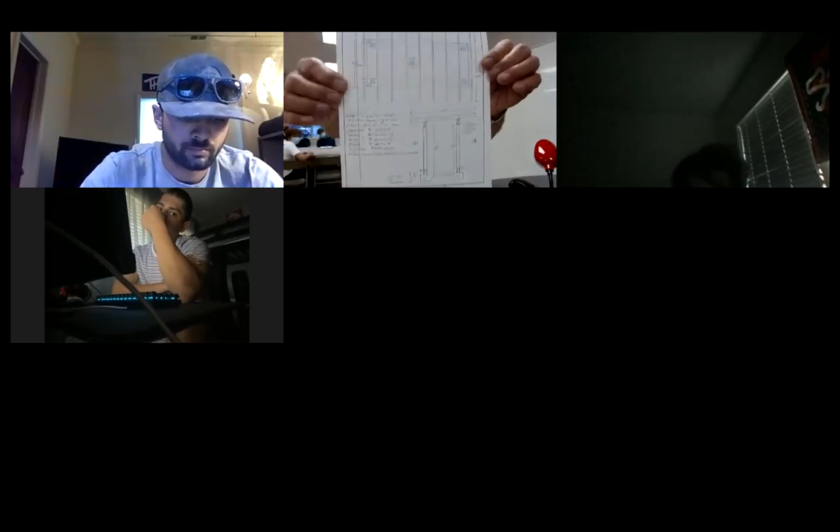When we get to it, I'll show you. I have this stuff I can put on the board, but I have a quote which I'm going to flesh out, and then we can project the plan that I did. You'll see it in more detail, see how I can take off. I actually did a checklist on the plan, which needs a few more things. So let's get down to the test.

But before we do, as is my nature, I got to tell you something about me.

You're not going to find this game. It's produced in '56, I think they probably made it through '60. In 1958, I was traveling with my parents from Missouri to California, I was 10 years old. We stopped, I think, in Phoenix - I don't really know - and I think my dad bought this game. Not this actual game - I bought this one on eBay and got it about a week ago. My dad bought this game, I think, at a drugstore somewhere, and he came back to the motel room and started playing. I remember going to sleep while my dad was playing this game, and in the morning when I got up, my dad sat me down and showed me that he'd worked out how to do this game. Now this game - the whole thing, the second board - this is the deluxe double master set, so when you jump, you just put it over here, so you don't have a pile of pegs to reset your board. You can just put them in this next board, so you're ready for the next game. So the object of this game is to jump a peg.

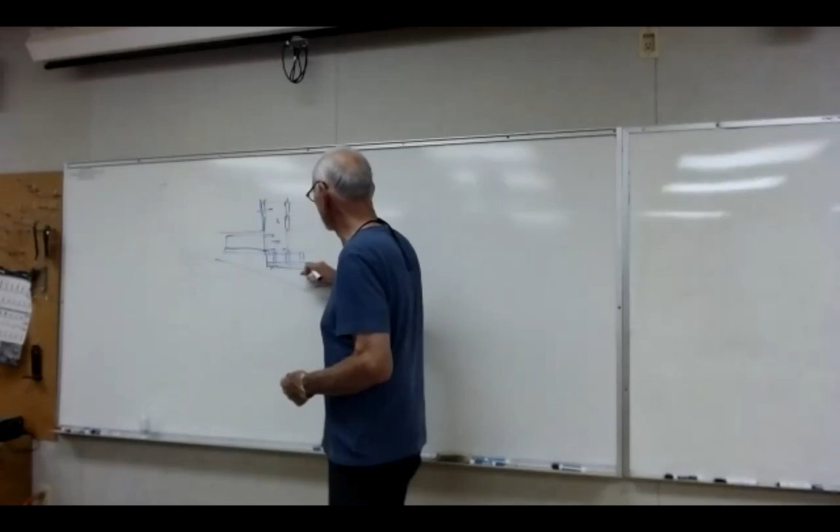Say this is where your floor is, right? You have a sill plate, and there's your rim joist. And now your rim joist keeps going, and you just cripple up. So this becomes a cripple wall. Another plate, cripple wall, a little taller cripple wall, and you just cripple up. We'll get to that more on framing, but that's the idea of a stepped foundation.

Stepped foundation. Okay, Rodney, in the case of that, do you have to drive the rebar down way further? No, the rebar is never driven into the ground. The rebar is suspended inside your forms, always. You don't want the rebar touching the ground at any time. You don't drive it, you can hang your rebar from forms.

So in a case like that, what's keeping it from sliding down the hill? It's all tied together, staked and nailed. Each one of these form boards above the trench has got a stake driven in the ground, and a duplex headed nail. It's got a head that you can pull out, and that's what keeps the forms rigid. When your forms are done right, you can walk on your forms. And then you hang your rebar from the bottom and step up, and it's all tied together.

So there's nothing on a step foundation holding the concrete into the ground, other than the trench. It's just sitting on top. It's down in a trench, and it's filled up the trench.

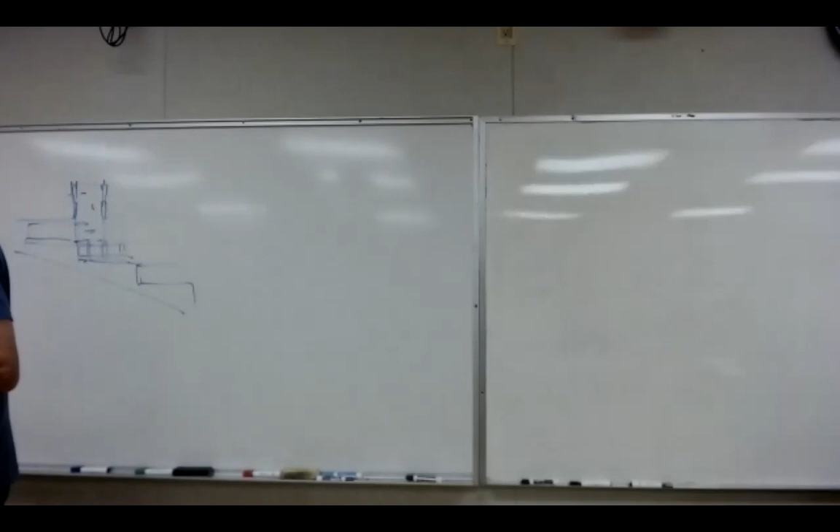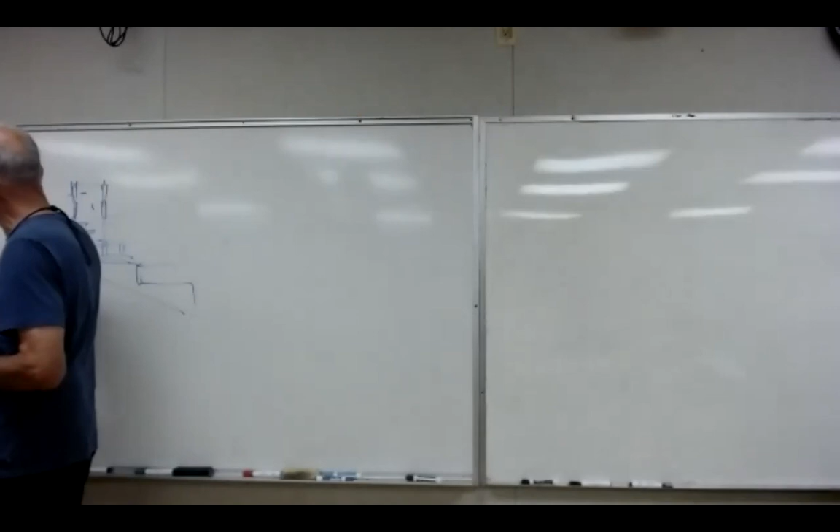Depends on what the engineer says. The engineer will tell you exactly what that foundation needs to be, how deep the foundation needs to be, because he'll do his calculations based on a soils report, which will tell him where undisturbed soil is. That's what he's looking for. He doesn't want to go down and fill. He wants the bottom of that footing trench, undisturbed soil. That's where your concrete goes, in full rebar, and then you build on top of that.

And if it's a slab on grade, you just come up above 6 inches, and then there's your slab, and it's all filled with concrete. On a raised foundation, you do a footing stem wall all the way around, and then you hang joists, so you have a minimum of 18 inches of clearance. So if you're doing a raised foundation, we've been talking about slabs on grade, and that shade structure will be slab on grade.

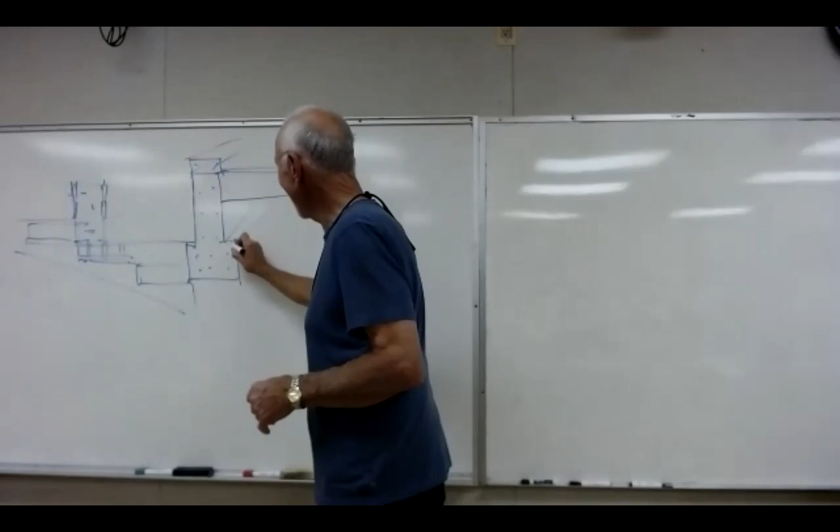But if you're doing a foundation wall, here's grade, right? And you're doing a foundation wall, it's really down into it, kind of a big footer like that, bars running through it, and bars running through this, going like that, and like that. That's all under grade, and this is grade, right? This baby gets stuck over, and then you can do this a variety of ways. You can put a sill plate on here and then build your walls up from there, hang your joist off that sill plate. You can hang them down like that. There are a variety of ways to frame, but this joist has to have 18 inches minimum clear to the ground.

That's code. That's UBC, that's IBC. You have to have 18 inches. So you usually have to over-excavate to get that 18 inches.

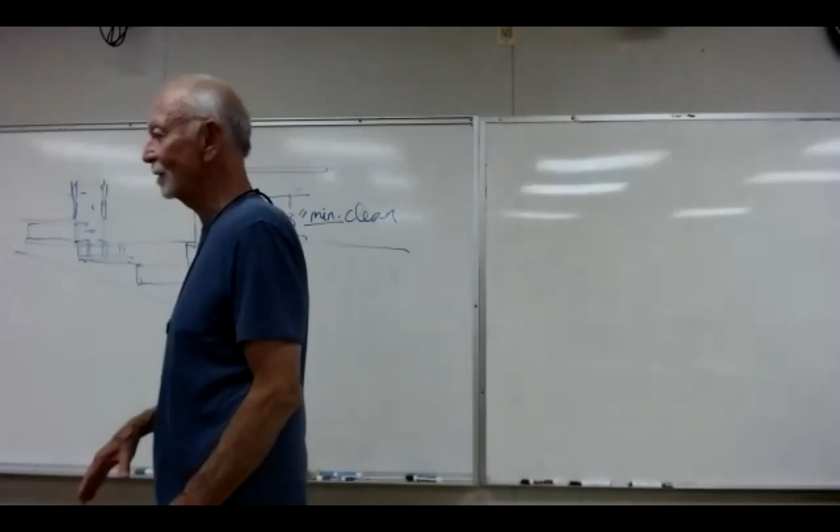And I prefer a raised foundation any day over a slab on grade, personally. Why? It costs a little bit more. Slab on grade is easier to do, takes more concrete, less wood. It's lower, it's faster. But a raised foundation has its limitations. With slab on grade, you're down low. Where a raised foundation, you're up above grade. You're where the critters can't get you as easy and the water can't get you as easy. You have give on your floor. You have a wooden floor. You have some forgiveness on your floor. It's not this concrete floor. I hate concrete floor if I'm spending a lot of time on it.

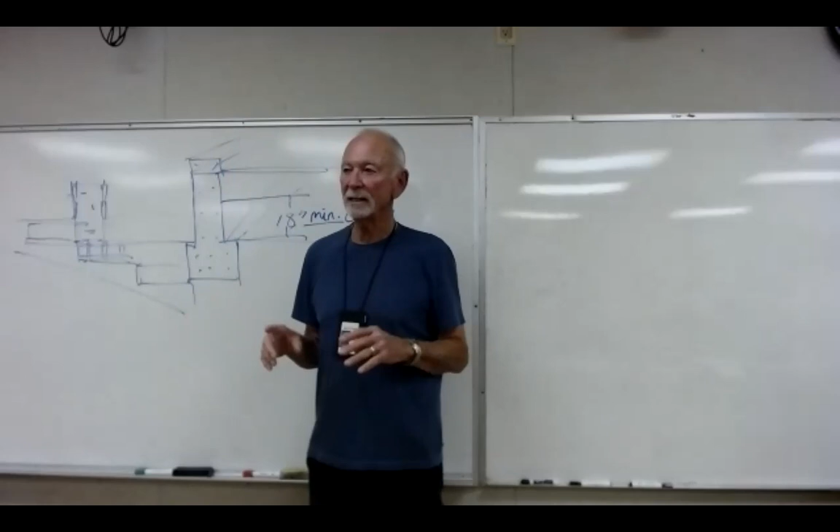And you have a place to run water, you can put a forced air unit down there and run your floor ducts, because here's how forced air works. Right now, FAU, a forced air unit, is the most efficient way to heat your house because it's a closed system. Now, there are people that will argue parts of this, but they can't argue the fact that a closed system is the most efficient way to heat your house at this point. And the best way to do it is to have your forced air unit low, so you don't have to chase and bring air down.

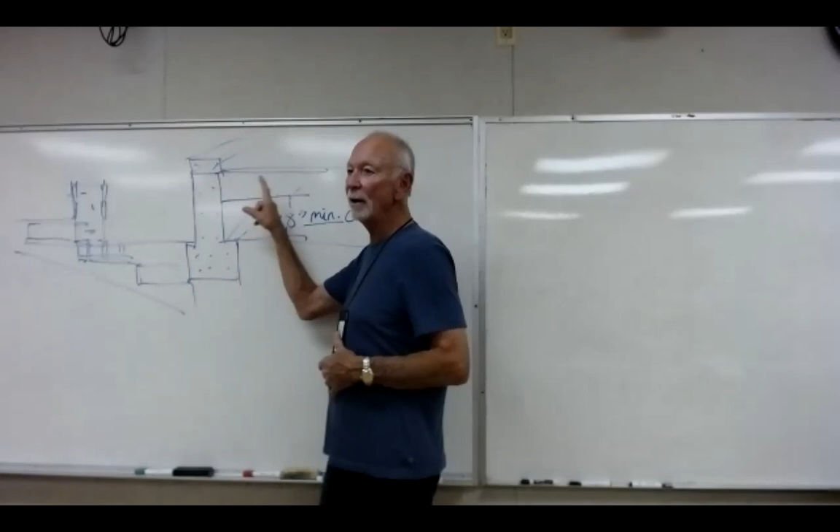So it has a return air grill somewhere in the middle of the house, and then every supply air register, the ducts are run under the house, and they come up and pop up to the floor underneath a window or an inactive French door, the one that stays closed, the door closes against. Inactive French door. Come to my house and look where my registers are, inactive French door, under windows.

And so what happens is that forced air unit, when you turn it on, it's gas fired, makes hot air, right, and a fan. That fan blows through the ducts and it feeds these floor registers. And heat rises naturally, so it comes up hot, and then your return air in the middle of the house is a big grill, and it's drawing, it has a fan that draws air. So it's drawing from all the exterior of the house, all the way across the house, into the return air to be recycled, to have that air reburn, come back as supply air. So it's a closed system that brings hot air all over your house fast.

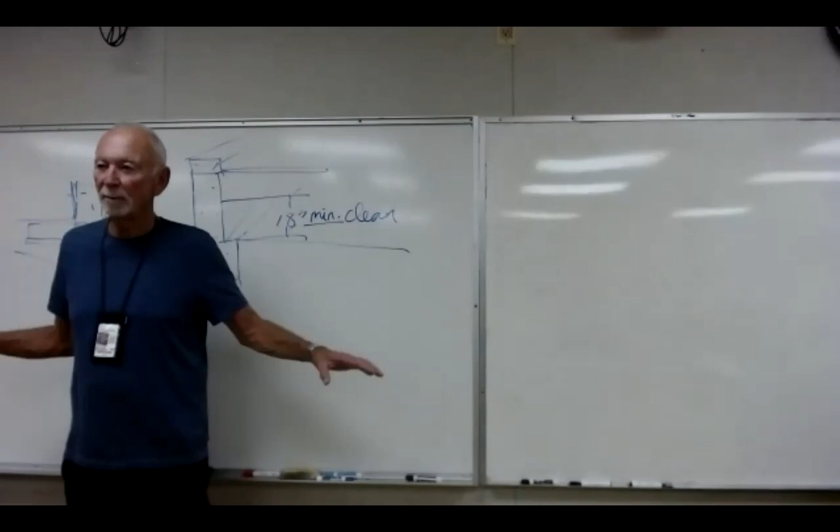My house heats up in 3 minutes. If it's cold, if it's 61 degrees, 59 degrees in my house, I turn that thing on and in 3 minutes it's warm. A forced air unit is pretty much what our heaters are in everybody's house, unless you've got a gas-fired wall heater or a direct vent heater, something like that.

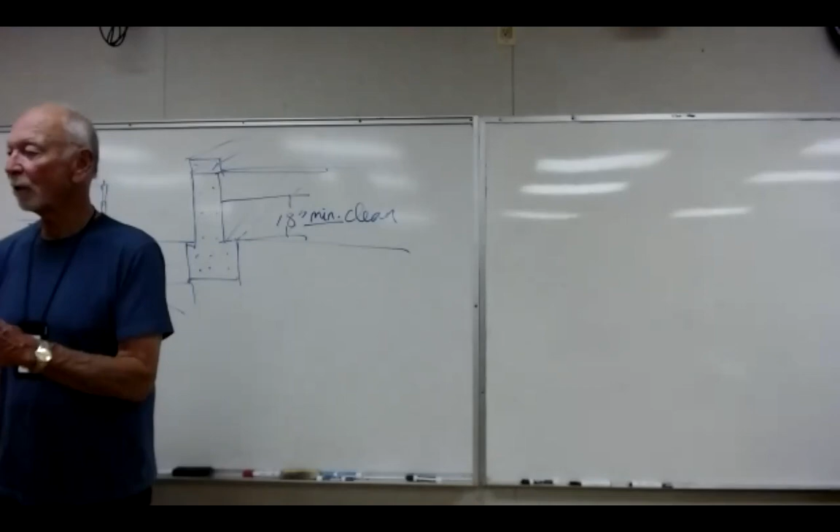If you've got a gas-fired heater, you've got a forced air unit, unless it's an old house. In an old house, you might have a gravity-fed furnace, which are pretty great and based on somewhat the same principle. They have return air that draws, and they have floor registers or low wall registers, usually a register in a wall that comes up low, with a register on both sides of the wall. But the problem with gravity heaters is they have a heat exchanger, and their heat exchangers are prone to eventually cracking. What happens is carbon monoxide, produced in the combustion part, gets into the ducts and into the supply air, and you never wake up.

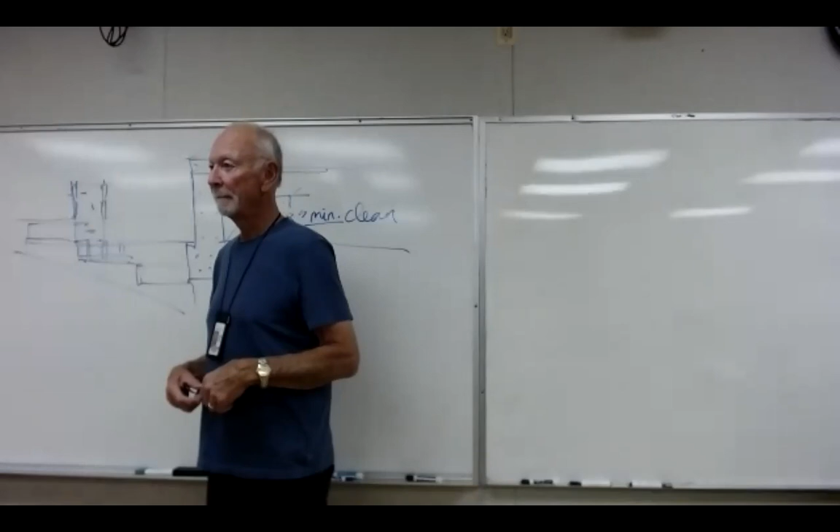You go to sleep at night with your heater on and you never wake up because you die in the middle of the night from carbon monoxide. That's the reason we're required to have carbon monoxide sensors in the hallways and stuff like that, because of gravity heaters. And that's the only reason. There's nothing else that produces carbon monoxide. I mean, I take it back.

We produce carbon monoxide when we're in our bedrooms sleeping. Right now, I'm producing carbon monoxide. We all are producing carbon monoxide. We have fairly good ventilation here, we've got a HEPA filter, we've got some air moving, so we're not feeling the effects of it. But in your bedroom, with the windows closed and the doors closed, they test the carbon monoxide levels and they go sky high. So it's always better to sleep with your door open and your window open, getting air, unless you have an HRV or ERV, which is heat recovery ventilation or energy recovery ventilation, where you're bringing fresh air all the time. You're doing air changes, which is a really good thing.

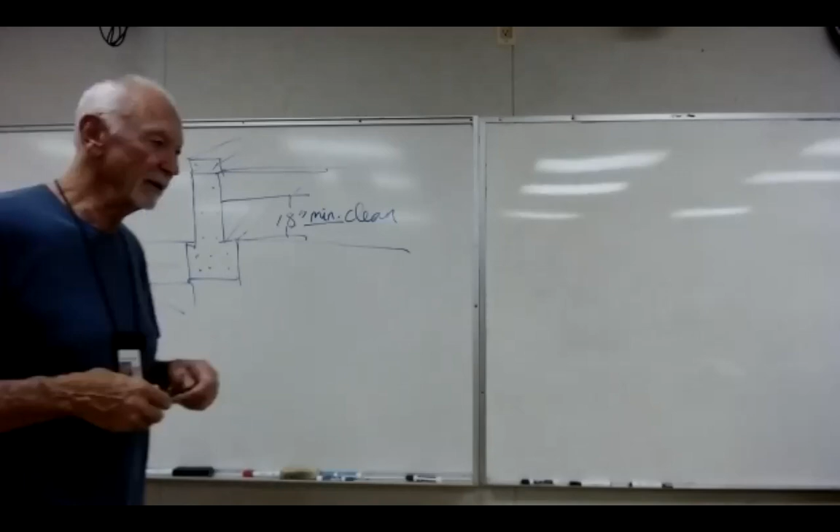We're not there yet, so I know I just deviated like crazy. I'm going to do board feet and then we're going to take a break.

Somebody, Jesus, did you show up? No? Did you show up here, Jesus? Jesus had 756. I think Claire, I think you got it right.

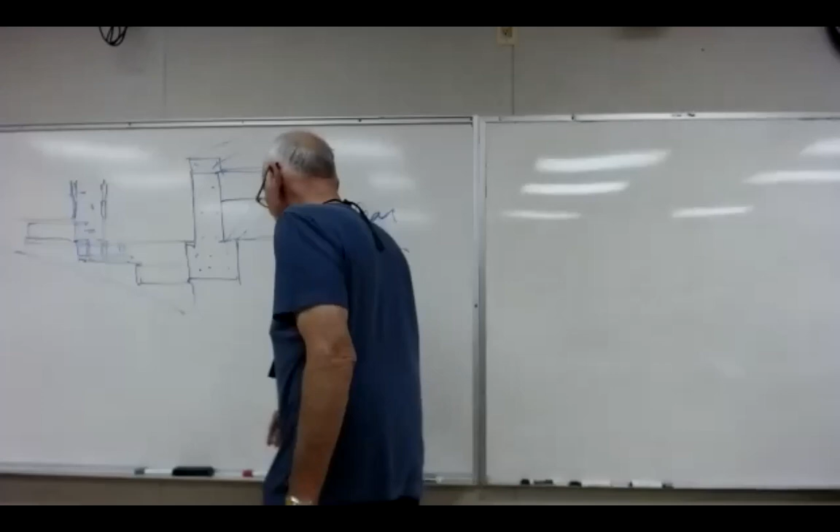Okay, so let's do that board foot problem, because it's kind of, it wasn't the easiest board foot problem. But board feet is pretty important really, because once you understand it, it's how lumber is sold. It's sold by the mill board foot, 1,000 board foot, but forget the mill board feet, just call it board feet. So let's find out how many board feet are in this piece.

This piece of mahogany, it's just a single piece of mahogany, and it's 8 inches thick, 9'6" long, and 16 inches wide. That's a hefty board right there. So you want to know what that board is going to cost, right?

Because this will be on the midterm, I bet you. Let's say you know that genuine mahogany in that size is costing you probably $9,500 per MBF. What does that mean? It means mill board foot, which is 1,000 board foot. So $9,500 per 1,000 board feet. Now, a mill, right, is 1,000.

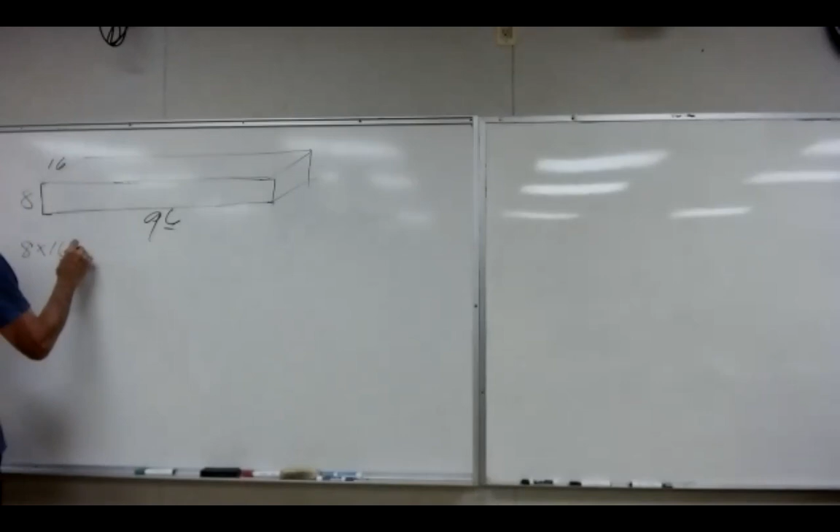So the simple formula, we won't do it the way I do it, we'll do the simple formula: thickness in inches, 8, times width in inches, 16, times length in feet, which is 9.5. Now, 9'6" is best represented in a decimal as 9.5, because 6 inches is half a foot, right? 6/12, we want to reduce that fraction. 6 goes into 6 one time, so it's a half, and a half as a decimal, 2 divided into 1 equals 0.5. So it's times 9.5. So 8 times 16 is 128, times 9.5.

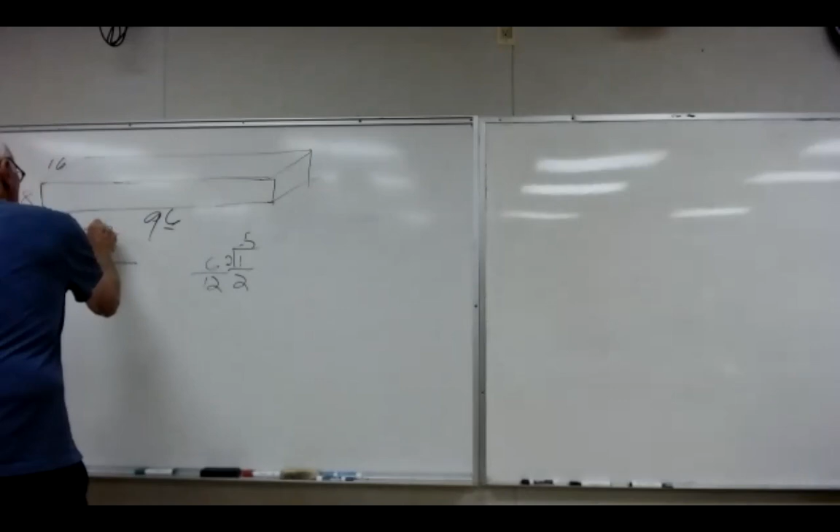All right, 128 times 9.5. So the answer to this quotient is 1,216. Of course, everything's over 12, right? So divided by 12 equals 101.3.

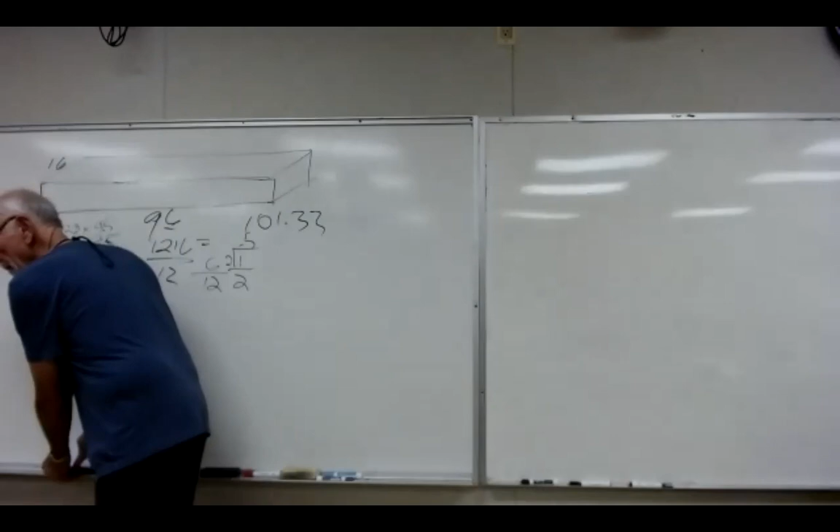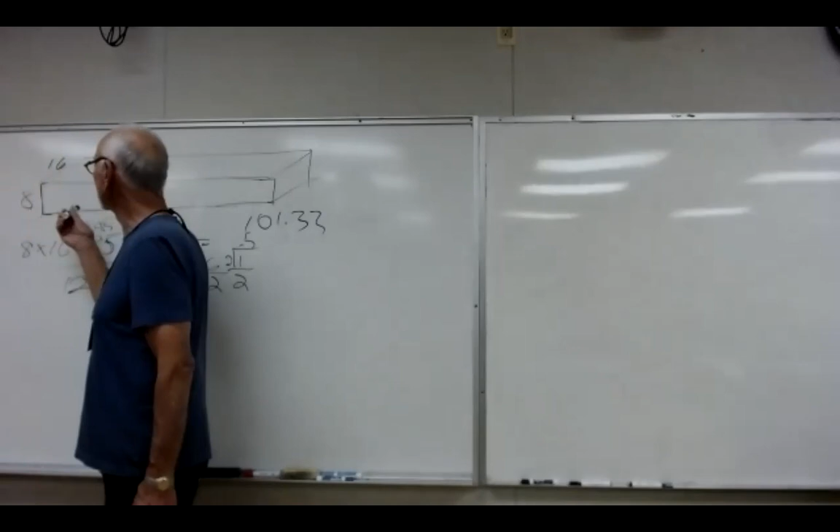101 board feet, okay, see how it worked? Now here's how I do that in my head. I'd go 8 times 16 is 128, because 8 times 10 is 80, 8 times 6 is 48, 80 and 48 is 128. I can keep those numbers in my head. At 128 over 12, well, 12 times 10 is 120. So I know that's 10 with a leftover of 8. 8 over 12 is 2/3. So it's 10 and 2/3.

Or 10 and 2/3, as a decimal that's 10.666 per running foot. So then I'm just going to do that 10 and 2/3 times 9.5. It's pretty easy math, right? And you get the same number regardless of how you get there. The number you want is 101.33.

And what he didn't ask you to do is tell us how much it's going to cost, if it's 9,500 for 1,000 board feet. So at 101.33, we're going to do it times 9.50. Let's see how much that board costs, and that's a real number. So that's 9,500 per 1,000. So we got 101.33 times 9.50 equals, times 8.75 equals, plus...

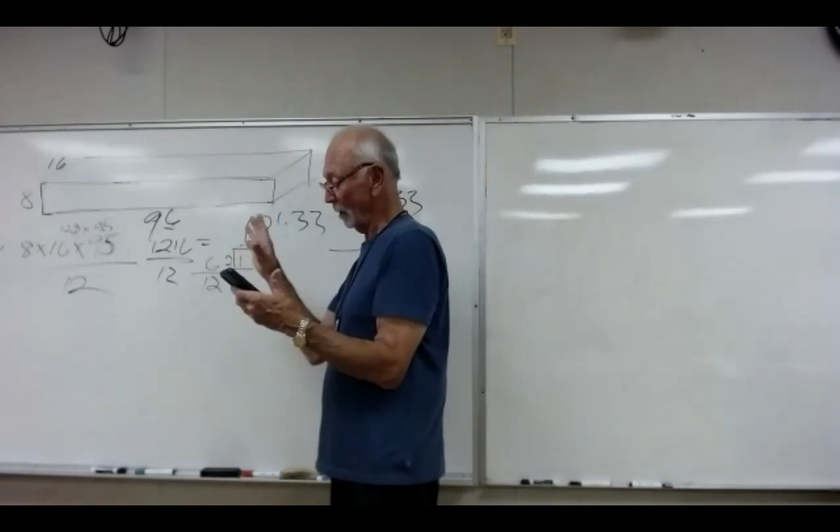Okay, so 101.33 — oops, I didn't clear something. 101.33 times 9.5 equals. So that's it, close to 1,000. Well, then add tax, times 108.75% is $1,046.87.

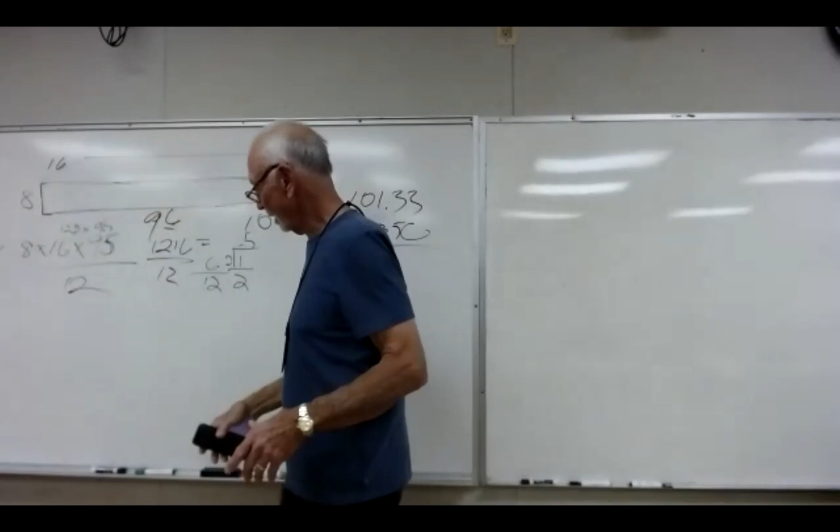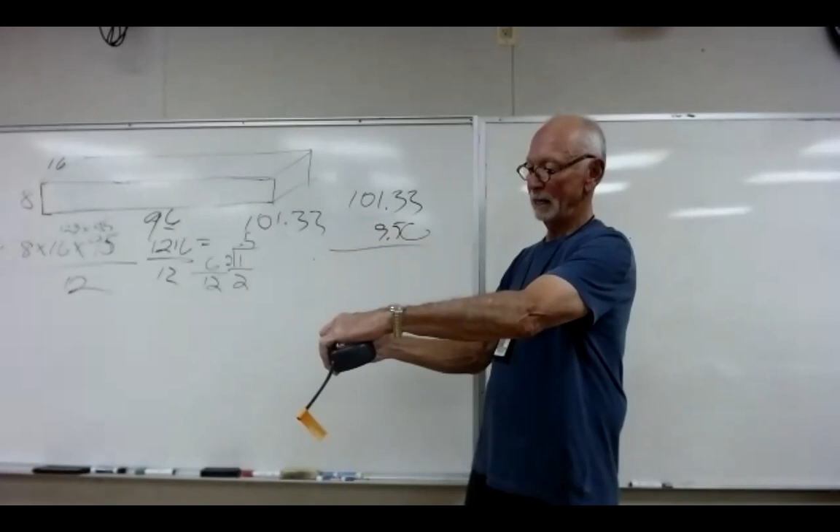That board costs almost $1,000. That's thick. Now remember, that's a piece of genuine mahogany, a big thick piece. That's an 8x16, that's a monster. That's taking a big chunk out of a tree. I mean, really get a sense of this — the length is not that much, right? It's less than 10 feet. It's not a huge board. It's that long, but it's that thick, that wide. It's a monster. A $1,000 board. If that were fir, it'd just be half that.

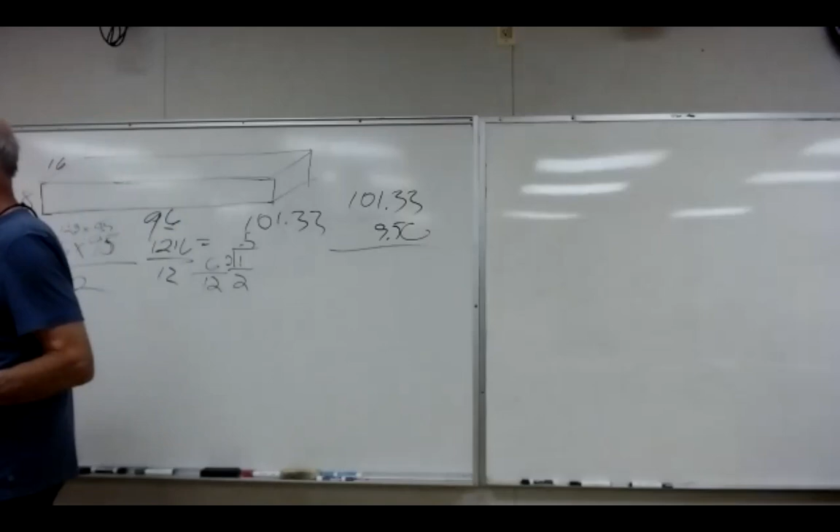Fir is now going for — what'd that quote come out? So I got for the shade structure, I had him quote DF number 1, select exposed FOHC. Does anybody know what that means? Anybody at all? Okay, so I'm going to tell everybody what that means, what stuff I ordered for that. I ordered DF number 1 — Doug fir number 1. That's the highest grade of construction grades, hand selected and stamped, number 1.

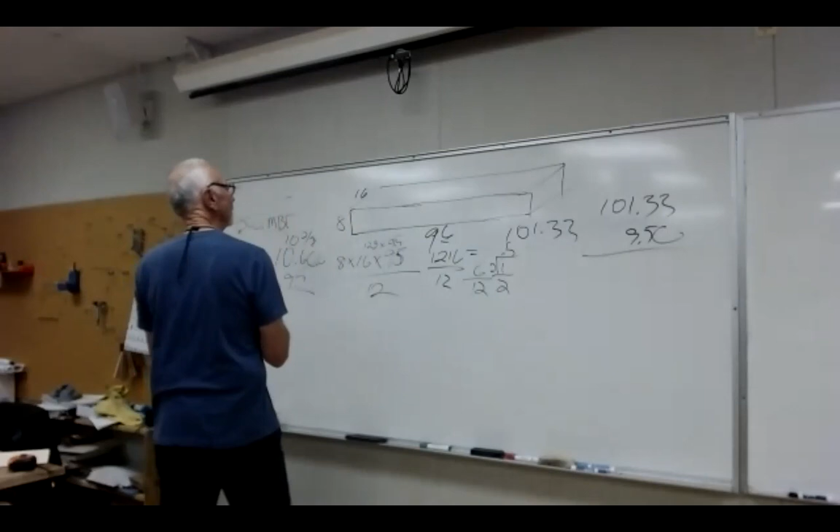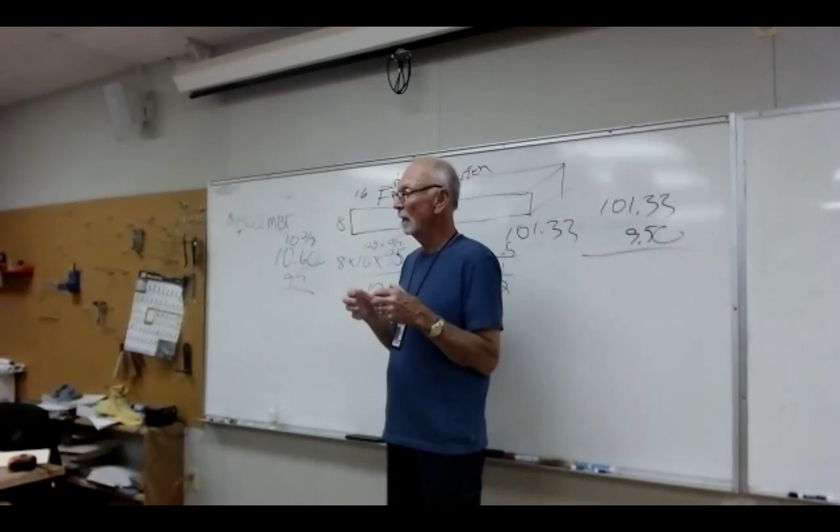SE, select exposed — another visual inspection. It's going to have square edges, not rounded edges, because I want it select exposed, and it's going to be FOHC — free of heart center. The heart of a tree is pithy. It's prone to being soft and having checks, off color, and wane. So you want it free of heart center. You want to get it out towards the edge of the tree, away from the heart. So the best material I can order, which is going to cost the most but last the longest, straightest, and truest, is going to be FOHC.

So that's not bad, that's not bad. So $3,350 per 1,000. So if we were getting this in fir with that designation I just said — select exposed DF number 1 — $3,350 per 1,000. That would be... what's a board? How much does a board foot cost when the lumber costs $3,350 per 1,000? $3.35, exactly. Damn it, good job.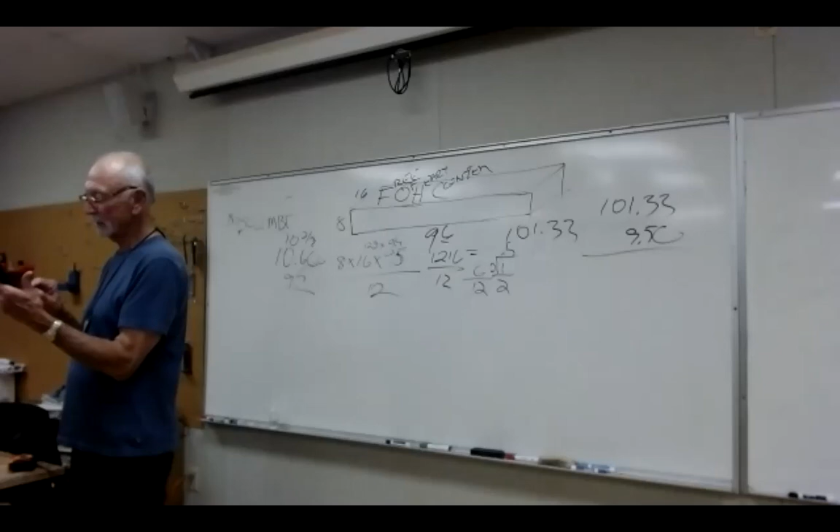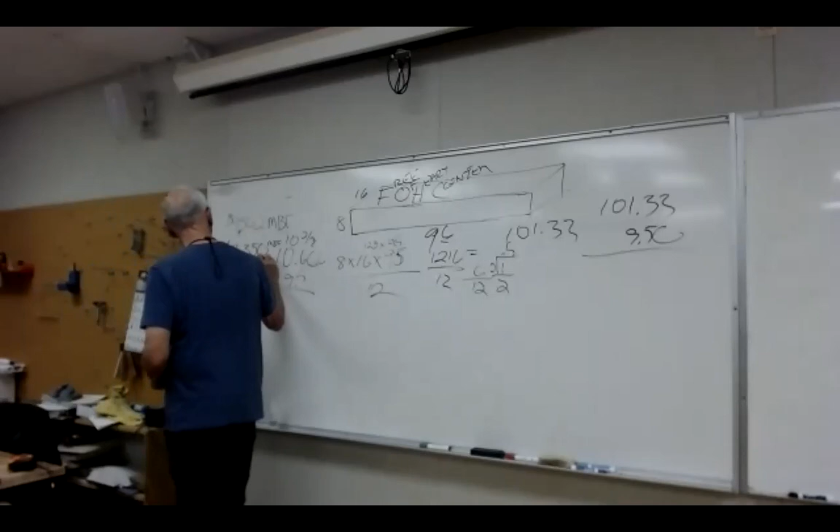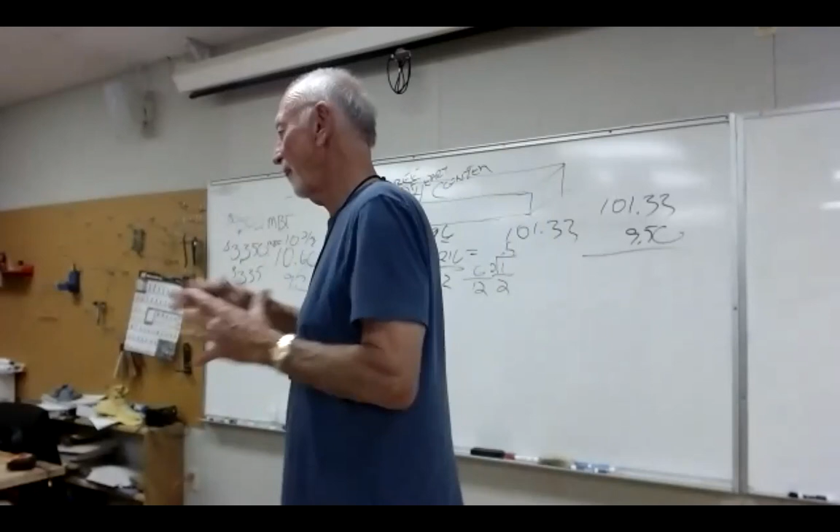Unit price — I want to put this on the board too. $3,350. It doesn't say $3.35 a board foot, it says $3,350. See that? So if you don't know what I'm talking about when I say MBF, you're going to go, what, how does that work? So, you know, all of your board stores, all of your quotes, all those guys are dealing in thousand board foot, and you need to translate that to board foot, not thousand. That's how you do it — you just move the decimal three points. How different is that from 6 years ago when you sold your company? Okay, so that is triple.

And the 2x4s — 2x4s used to be $405 per 1,000, are now $2,150. Wow, that's 5 times. So 2x4s from 6 years ago are 5 times more expensive. And the boards and the larger beams in this particular case are 3 times more expensive.

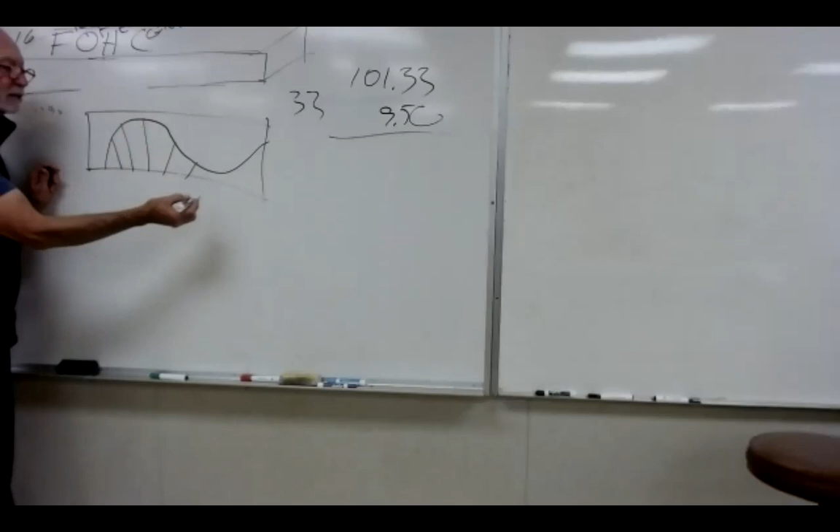You want to cut that out. Run it through the bandsaw like that. Now that's a fairly tight cut, so you might want to cut into your line in a few places. These are called relief cuts. You cut in, stop the saw, back it out of the cut, start the saw, cut in again, stop the saw, back it out of the cut. Don't pull the board out of the cut while the bandsaw is running - always stop the bandsaw. Once your relief cuts are made, then you start cutting.

You don't have to get your bandsaw really tight into these curves, because when you get to here, this piece is going to fall off. When you get to here and start making that curve, that piece falls off. So the pressure on the back of the blade to make the curve isn't there anymore - you've relieved it. Same thing, boom, falls off. Boom, falls off. Right? Relief cuts for tight curves make it simpler. Because it's a bummer to get too tight of a curve and the bandsaw stops - it sucks. Relief cuts.

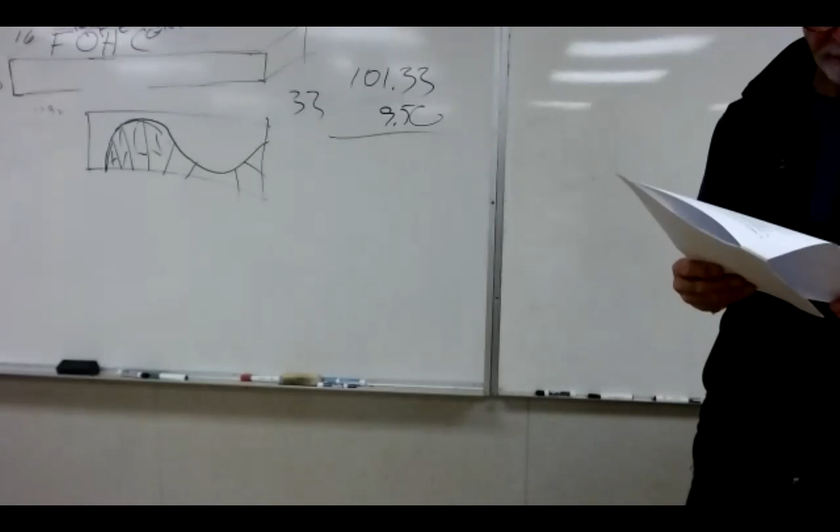I have to show you that actually. 62, we're getting there, man. We're getting there. Was this a quiz? Yeah. God, it feels like my whole life - my whole life passed before my eyes. I even drank a Dr. Pepper. I haven't had a soft drink in probably 25 years.

Wow, let's see what people just like crack. People strung out on like 3 Diet Cokes before noon, right? Yeah, 2 six-packs of Diet Coke a day. I know somebody that does it. Do they not drink water? No, they don't, they drink Diet Coke. People that are strung out on Diet Coke are strung out. It's bad, really bad stuff.

So the circular saw safety in preparing to make a cut: peg the guard with a broken off shim - I already told you guys it's a bad idea, and I'm sure you figured that out yourself. Make sure your watch band is tight and your necklace is inside your shirt - that's a good idea, but that's not what was on that safety question. Drop the blade to cut an inch deeper - we already know that's bogus. So it only leaves support the surface being cut, which is reasonable, so you probably got that whether you looked at it or not, even though some people got C, because it's reasonable.

So, plumbers are one of the lowest paid construction workers - is that true? It's really not, plumbers are highly paid. Plumbers have kind of a bad rap.

Oh, by the way, that thing I said about painters about a month ago, I am so sorry about that. Painters are not scum of the earth. Painters are great, painters are an integral part of the process. Without painters - I told you this, right? Painters caulk and paint make a carpenter what he ain't. So we love painters, I take that all back. Painters are the greatest.

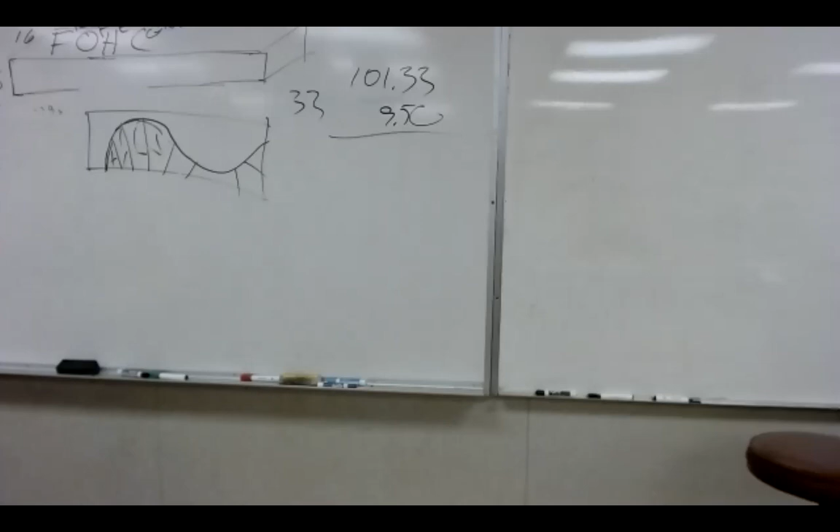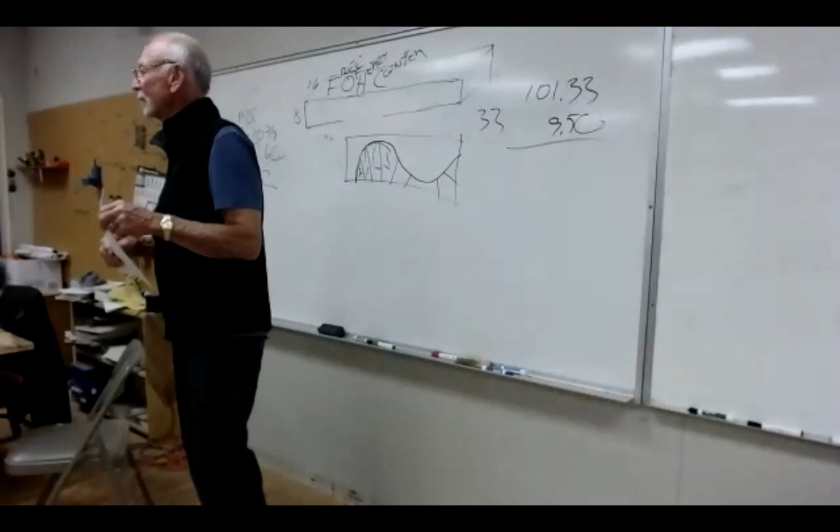You just - no, I didn't get in trouble, I just thought that was a stupid thing to say. Part of where it comes from is when my parents were divorced when I was 13 or 14, I guess. The first guy my mom brought home was a painter, and his name was Dick. I was so bad I would go, 'Hey Dick, how's it going, Dick?' I was bad, man. I hated his guts. Did he deserve it? No, he just wasn't my dad. He was probably a nice guy. But painters drink too - you're not a drunk, right? No, just kidding. But back then the VOC was a lot worse, there was lead in paint, and painters that breathed the fumes all day - it seemed like most painters were drunks. I don't know, most of the painters I know aren't drunks, so it's probably different.

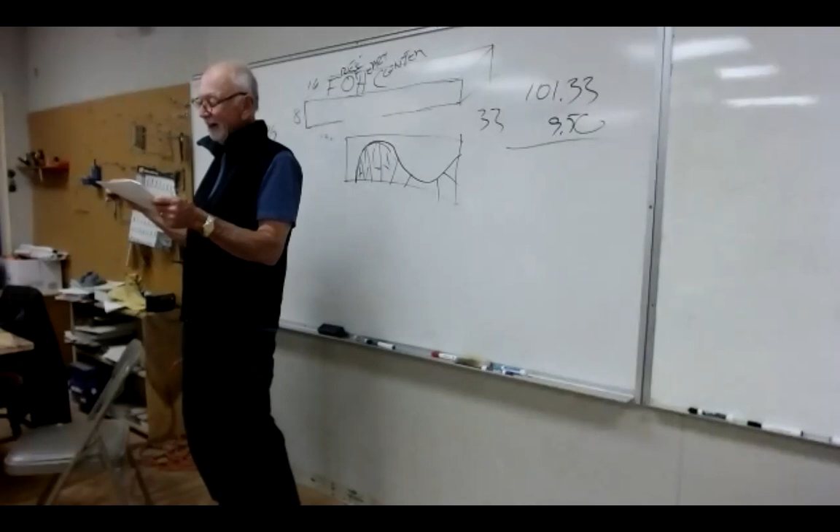All right, so on a set of plans, it's always best to build from the plan's call out rather than from scaling the plan - true or false? You want to look for the call out, meaning the written dimension on the plans. That's what you want to use, the written dimension. Even though it's to scale and you could scale it, and in some cases if you can't find a dimension anywhere you can go ahead and scale it, but you should look for the call out. Use the call out.

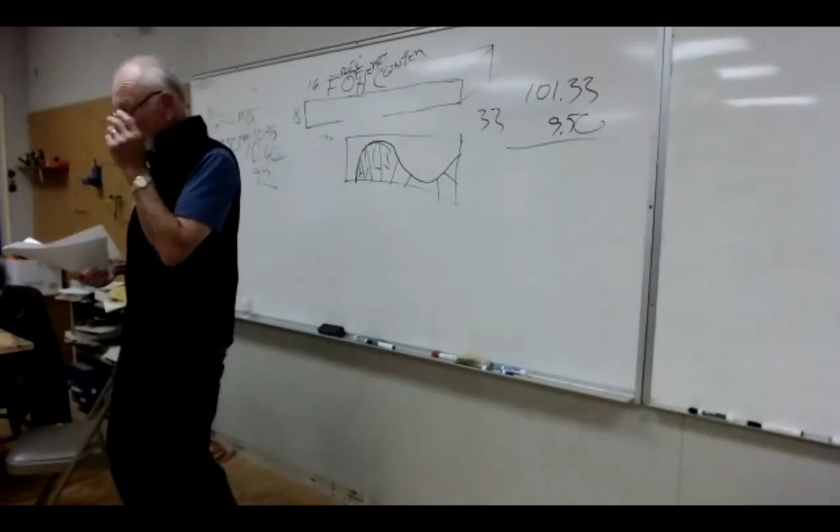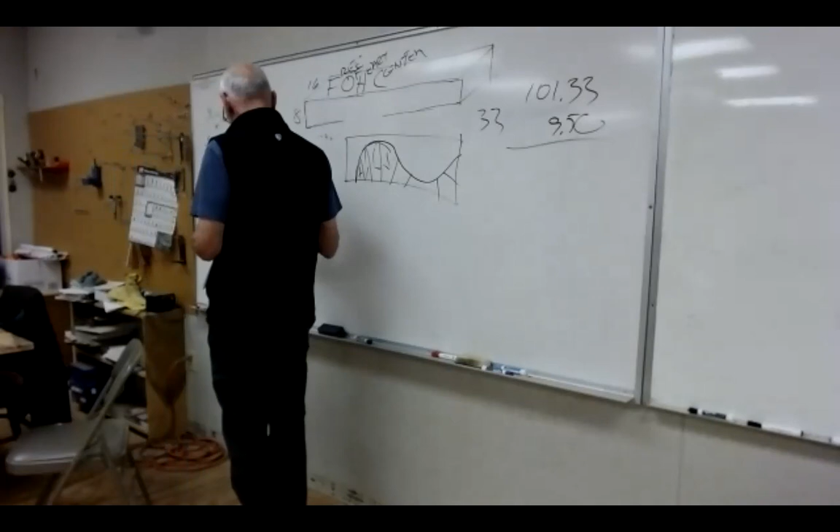It should show you the 6. So 6 inches of rise for every 12 inches of run would be a relatively steep roof. It's 50% grade.

Okay, now this guy, I don't know this. I will never give you a question like this.

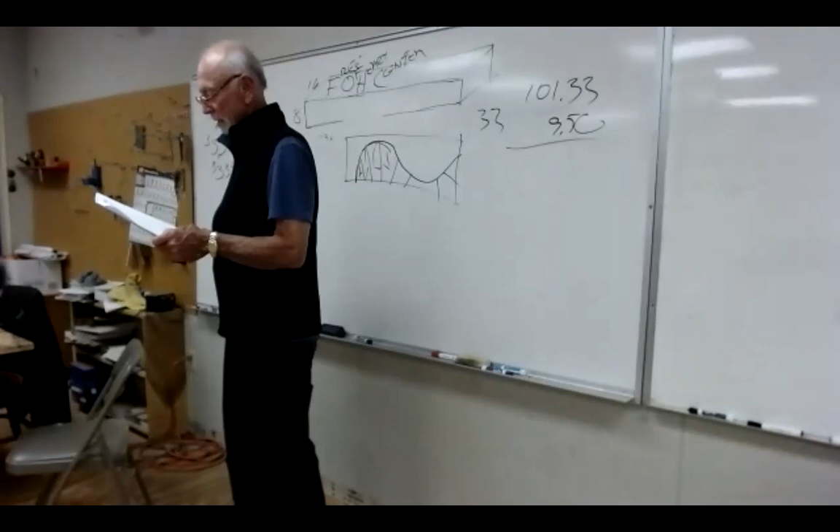So the magic number is 26. Yes, we wrote something on that, but I'm not sure what it says. What do you think it says? Excellent, yeah, it's excellent. XLNT, that's short for excellent. You got it right, right? Everybody that got it right, I usually wrote excellent on it. And some of you that kind of switched numbers, I didn't mark it wrong. One of you got just one wrong.

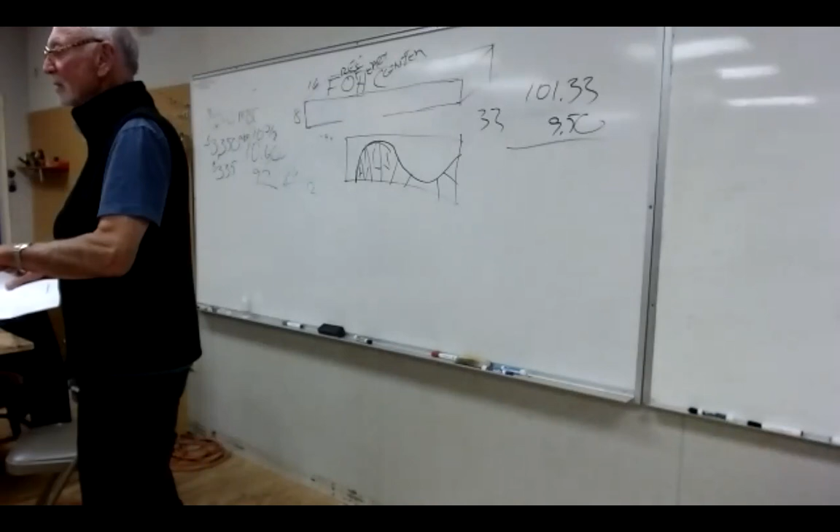This is worth 4, and the answers were A, B, C, and D, not the magic number. It should have been worth 5, really, if I'd been thinking about it. Because the magic number is 6 inches. So 6 inches is your height above grade. So when you shoot and this string is at 32, your finished slab is going to be 6 inches. So you got to take the 6 inches from the 32. And that's your magic number, 26.

Because then all those other shots at dead level, the grade, you need to measure 26 inches down. So it's simple: you go to A corner, you measure 26 inches down. The answer is 6, 26 from 32. Go to B, 26 from 38 is 12. 26 from 47 is 21, and 26 from 49 is 23. It's simple, simple math. You just gotta get that magic number right.

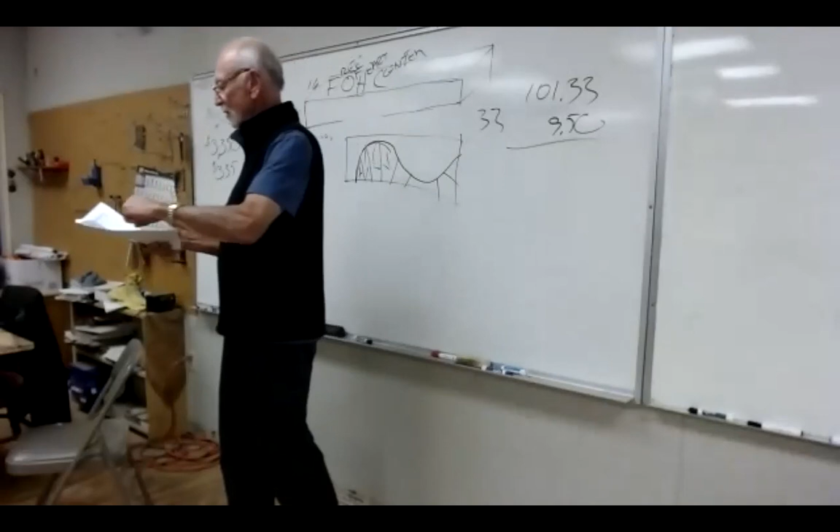And the magic number is 6 inches from the... which would be the low point? Which would be the high point. High point.

And being the high point, you've got to have 6 inches minimum, right, on grade. So what you don't want to do is start at the low point at 6 inches and then go up to the high point and have the difference be, so now your slab's like 2 inches above grade. So you got to start at the high point, have a 6 inch slab, and then as it goes down, you're going to have more slab. 6 inches is the minimum.

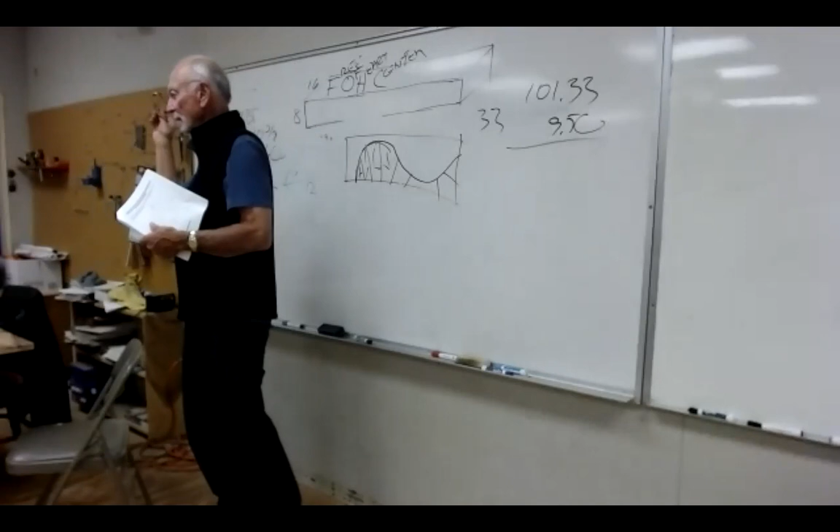Just like when I showed you the balusters, some of you I showed in the calculating and measuring class. You got to start at the high point because minimums are important.

An illustration I really like is picture this whole wall and a 36-inch high kitchen cabinet run. It's whatever this is, 30 feet to run. And if we throw our laser over there to here, it falls downhill 2 inches from that side to that side. Where do we start setting our cabinets at 36?

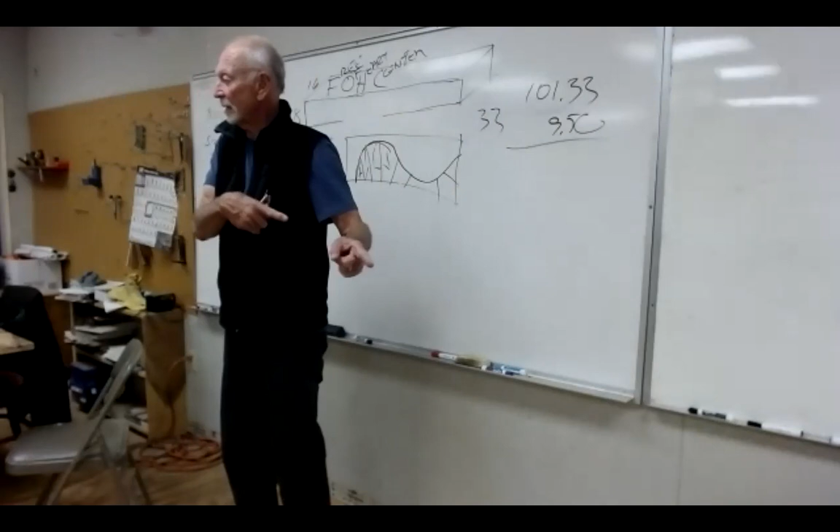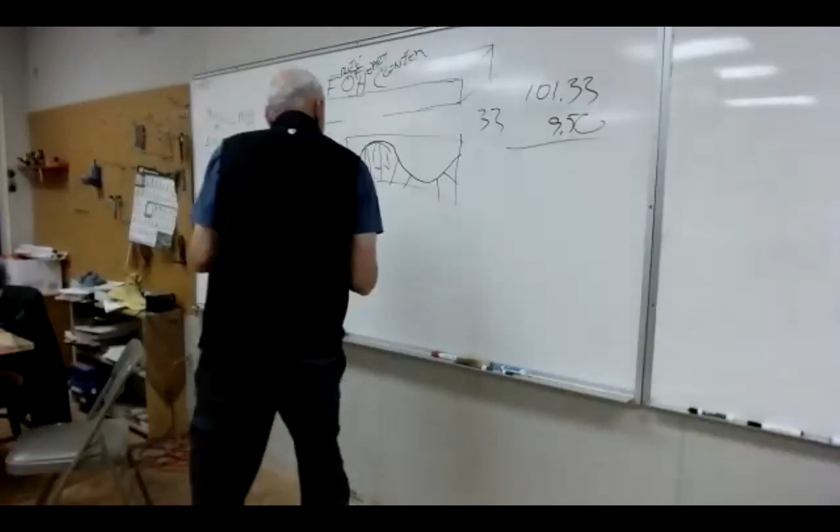That side, because they're minimum 36. And as they go downhill, the kick will go from 6 inches to 8 inches. Cabinets will be the same. There'll be a 30-inch box sitting dead level all the way across. And the kick will look like this. It'll follow the floor and it'll be dead level. And the cabinet sitting on it will be dead level, and you'll have your minimum 36.

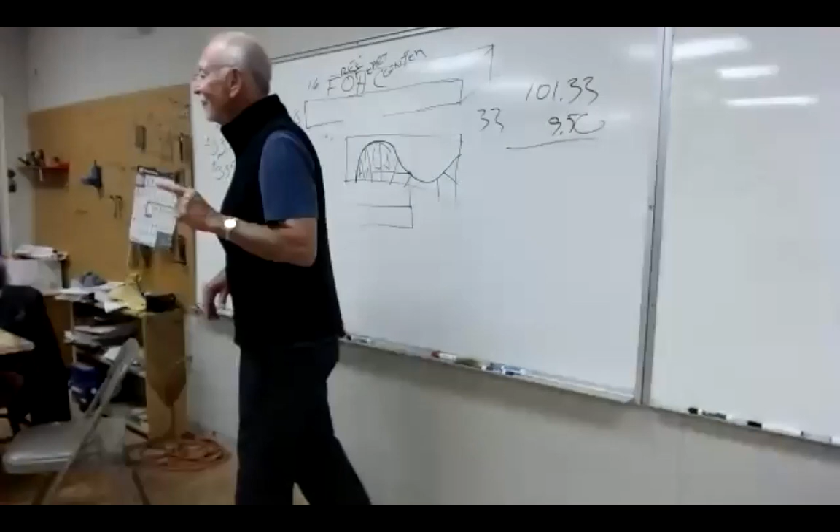Now the 36 minimum is for a variety of reasons. One is it's been established as countertop working height. We like it, although some people like 38. I like my counters a little higher, but you need 34 and a half to get your dishwasher. If you come down with a low counter, you might not be able to get your dishwasher. That's not good. They have some adjustment, usually go up, but cranked all the way down, they're supposed to fit in a 34 and a half inch opening, with an inch and a half top, finishing 36.

Dishwasher is really kind of the control point for stuff like that. And if you're higher, fine, you can put a filler in on top. Like my counters are probably 38. I have a filler above my dishwasher, and it looks great. I like it. And I'm tall.

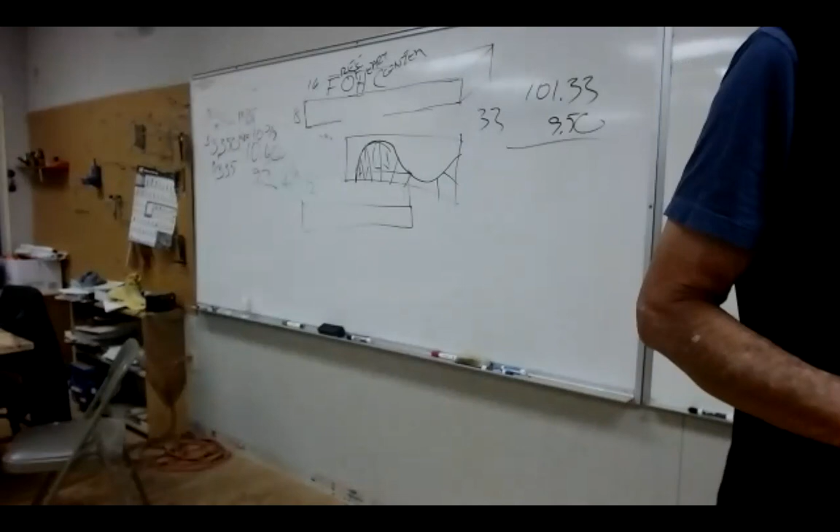My wife has to stand on a stool. Not really, she doesn't really have to stand on a stool.

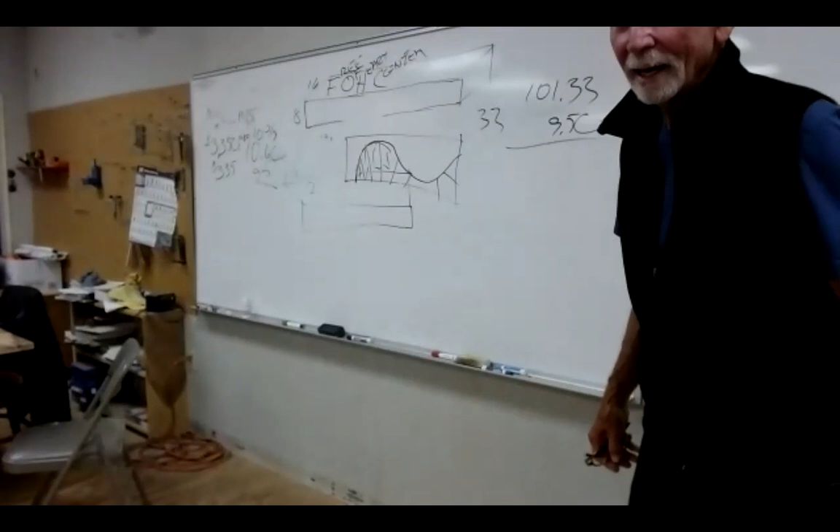Excellent job, yeah, these guys all did pretty darn good, right? We were just talking about some of the stuff, like the ABC on the fire extinguisher. At this point, if they got A on there, I'm going to give them the number, but if you got B or C, forget it. ABC works, or just A, and then you're gonna come up after.

Typically on a job site you're not gonna be dealing with the D fire extinguisher, because that's for metals that burn, like magnesium or something like that. So you're not typically gonna run into that. Typically you want one that will put out wood fire, electrical, and gasoline or fuel. So ABC is typically what we have on a job site, except for Rodney, and he has a D there, if he thinks.

D for Donald. You guys watch BMF on Starz? Ever watch it? Oh my gosh, it's black gangsters. Where in Detroit are you from? My hometown. Is that where you're born? I was born 40 miles from there, in Toledo. And my mom lived right on Lake Erie, she was born there. So I grew up in Detroit. When I turned 18, they had 18-year-old drinking in Toledo with 3.2 beers, so we'd get a carload of us. You didn't just go to Windsor? I think it was 18 to drink in Windsor too. We had to pay to go through the tunnel or the bridge, so. Yeah, the stuff we used to do, but now you guys could just call up the weed store and get it delivered, and Bevmo, right? Bevmo and Canopy.

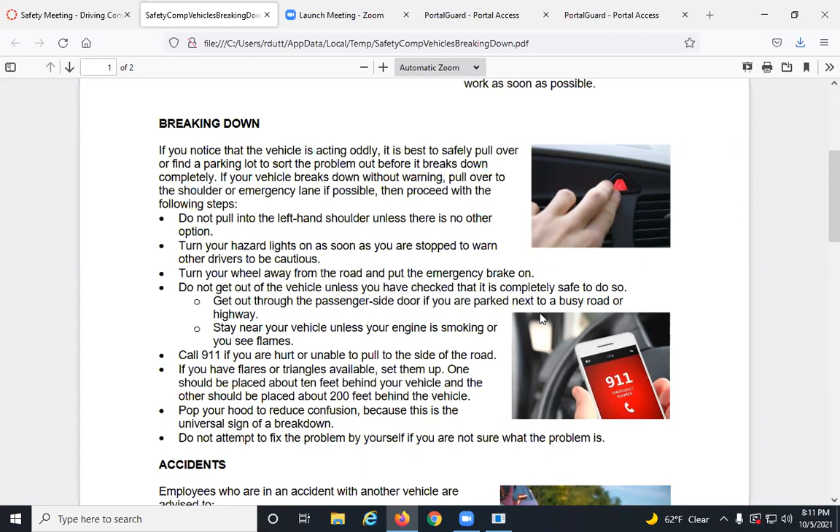Breaking down, Mike Silva. If you notice the vehicle is acting oddly, it's best to safely pull over or find a parking lot to sort the problem out before it breaks down completely. If your vehicle breaks down without warning, pull over to the shoulder or emergency lane if possible, then proceed with the following steps. Do not pull into the left-hand shoulder unless there's no other option. Turn your hazard lights on as soon as you stop to warn other drivers to be cautious.

Turn your wheel away from the road and put your emergency brake on. Do not get out of the vehicle unless you've checked that it's completely safe to do so. Get out through the passenger side door if you're parked next to a busy road or highway. Stay near your vehicle unless your engine is smoking or you see flames. Call 911 if you are hurt or unable to pull to the side of the road.

If you have flares or triangles available, set them up - one should be placed about 10 feet behind your vehicle and the other about 200 feet behind the vehicle... or 200. Pop your hood to reduce confusion because this is the universal sign of a breakdown. Do not attempt to fix the problem by yourself if you're not sure what the problem is.

There are accidents. Employees who are in an accident with another vehicle are advised to check yourself, passengers, and the other affected party for injuries, and call 911 if necessary. Pull over to a safe location, turn your hazards on, and set your emergency brake. Set up traffic flares, cones, or triangles as previously described.

Call the police even for a minor accident. Exchange insurance information with the other driver. Do not admit fault and limit your discussion about the accident to facts. Take pictures of the damage if possible.

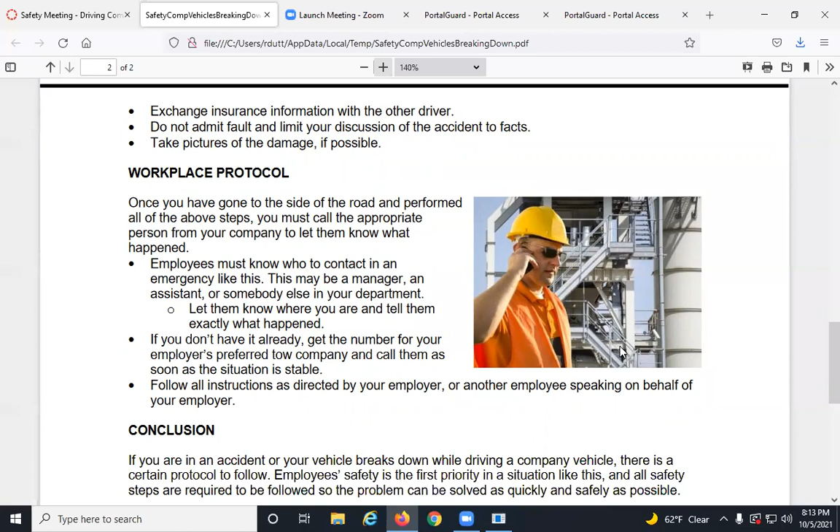Workplace protocol: once you've gone to the side of the road and performed all the above steps, you must call the appropriate person from your company to let them know what happened. Employees must know who to contact in an emergency like this. This may be a manager, assistant, or somebody else in your department.

Let them know where you are and tell them exactly what happened. If you don't have it already, get the number for your employer's preferred tow company and call them as soon as the situation is stable. Follow all instructions as directed by the employer or another employee speaking on behalf of your employer.

In conclusion, if you're in an accident or your vehicle breaks down while driving a company vehicle, there is a certain protocol to follow. Employee safety is the first priority in situations like this, and all safety steps are required to be followed so the problem can be solved as quickly and safely as possible. Any questions or comments on this safety topic? If driving a company vehicle, just drive safe.

The first car I got that wasn't a truck, after having trucks for so long. I was going to get a car for my wife, and she said, get a car for yourself. So I did. I went to Volkswagen of all places, in 1999, and bought a brand new Volkswagen Passat wagon, white, and put 5-spoke wheels on it. I just love that car, it's the greatest car in the world.

I had a motorcycle too, I think a Honda, a big V-twin 1500 or 1600, just a giant motorcycle. I had a Honda on Chapala. I was going to pick it up, and I went and picked it up.

I left my car parked and told my daughter Hannah, my youngest daughter, the filmmaker, to go by the house, get my spare key, get dropped off, pick up my car, and take it home for me. She said she would. The last thing I told her on the phone was don't crash my car. She was a teenager, so I'm sure what she heard was crash my car, which she promptly did. She T-boned a Suburban. I was so bummed, just wrecked the car. It was never the same after that, even after it got fixed.

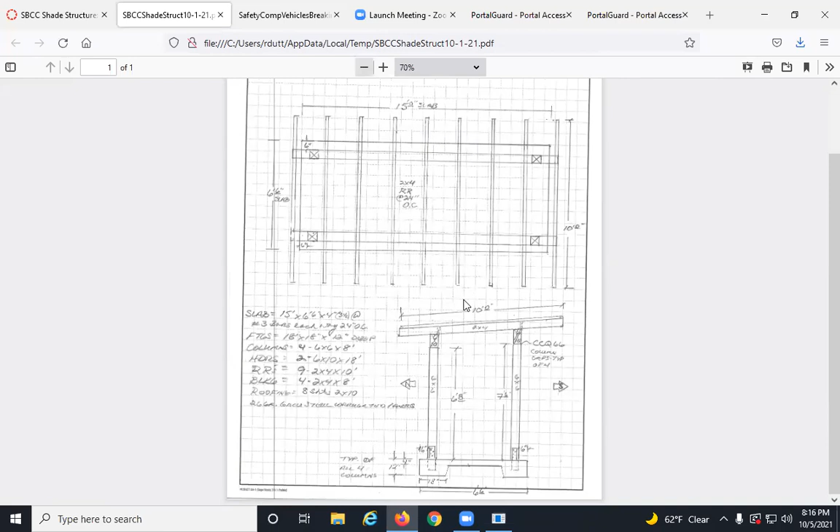This is a plan view. I didn't label the views, and I probably should have put plan view up there, and probably should have put elevation right there, and I may still. I might put line of slab here with an arrow. The slab is 15-foot by 6'6" slab, so that pretty much tells you the size of the slab.

We need to know how thick that slab is and what the footings are. So let's go down and look here. There's a side view, actually from that side. I might label the view, but you can see that I want footers.

I want these column bases. I didn't put them in there, did I? I got them in something else. Oh yeah, no, I didn't put them in there. Yeah, I did put them in there. I put the column caps, but I didn't put the column bases in there. I'll put the column bases in there, but I want them 6 inches away. They're 3 inches minimum, but I want them 6 inches away all the way around.

And if you scale that plan, which you shouldn't, you should look for a call out, right? 6 inches is from the edge of slab to the header/post, because the header falls right along on top of the post. Same thing there, 6 inches that way. What I'm not showing, and what I am showing here, which is actually the same thing, is it's 6 inches all the way around, so I want 6 inches on that side and 6 inches on that side of that post.

As far as the footing goes, I want the corners to be 18 inches square by 12 inches deep. So that's going to be dug out, and it doesn't have to be perfect, but 18 by 18 in the four corners, and then 4 inches, which is essentially what we call 4 inches.

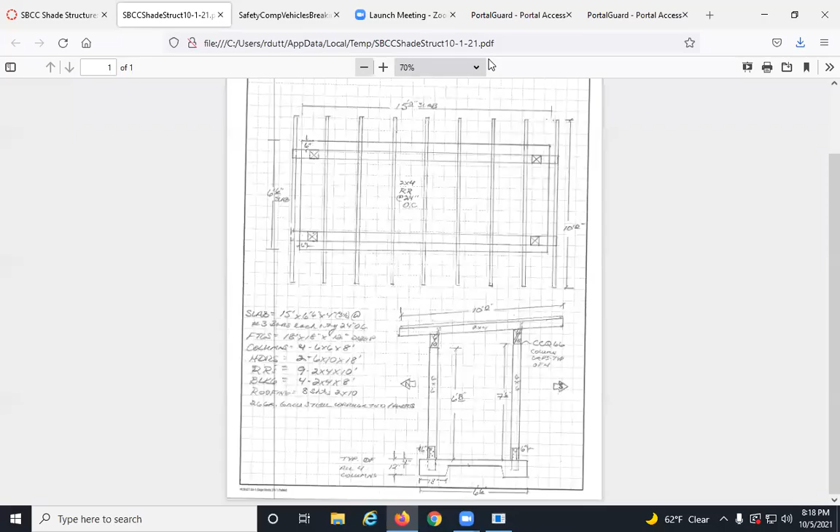And the column bases, I think I showed you, I think I showed them to you last week. I might not have, but hit the lights for just a second.

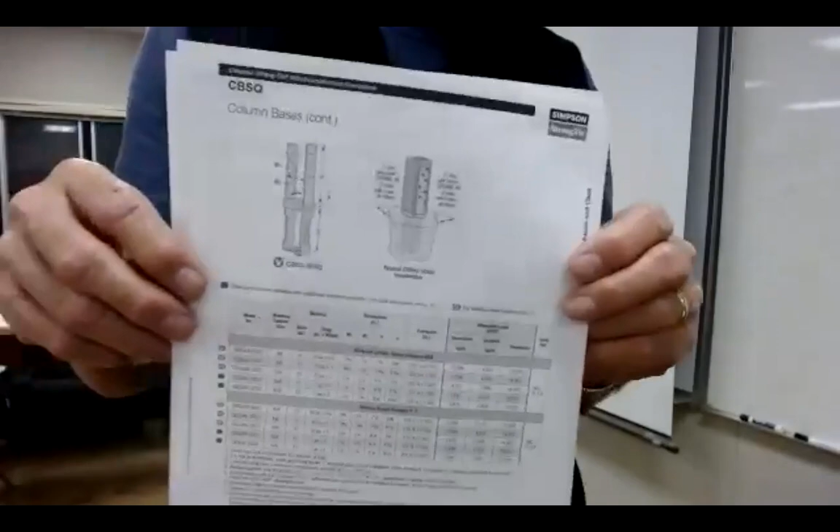And so the reason why I want to use this one rather than this one is this one takes through bolts. This one takes SDS screws. And the column bases will come with the requisite amount of SDS screws, which are 14 per, 7 a side. They're driven with an impact driver, or really any driver, it's a decent driver, you can crank all the way with a clutch or a powered driver, but you can drive those SDS bolts right through those holes and into that 6x6 post.

It's fast. You don't have to try to line up and drill a 5.5 inch deep hole exactly level to hit that other hole on the other side. Do you just not want to use a through bolt one because of convenience, or is there a certain circumstance? Totally convenience, and the SDS screws, 7 SDS screws a side is actually stronger. Now, better grab on the whole thing. Are they more expensive? Yes, slightly, in terms of dollars, those column bases.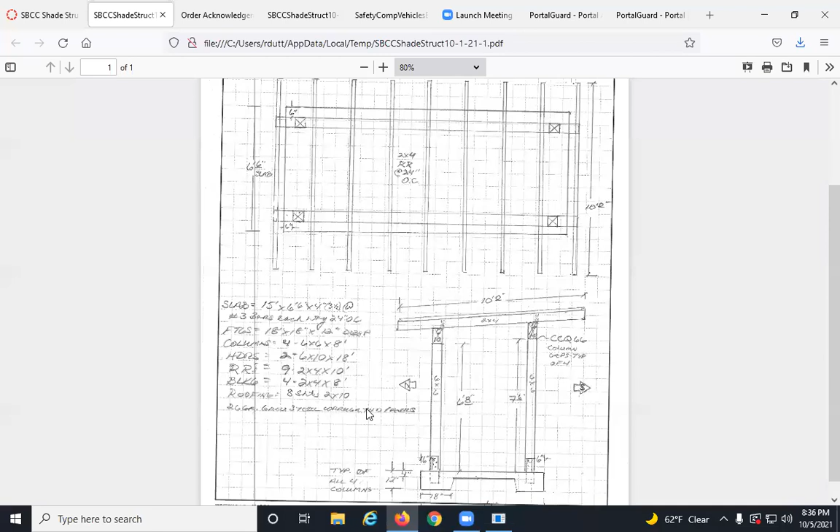So I'll flesh this out a little bit. I want to show you a couple things about the drawing.

3/8 of an inch equals a foot. Why did I use that scale? To fit the whole page—it's the largest scale I could get on the page. I could've used quarter scale, which means 3/16 or 1/8, but quarter is so hard to show details in. I would've way preferred 1/2 inch, and if I'd been using my drafting board I would've gone 1/2 inch, maybe 3/4, because the bigger the scale, the more details you can show.

So when you're drawing something at 9'6", in a bigger scale you can actually count the inches, where in quarter scale it's somewhere around there and a half foot. In quarter scale, a quarter of an inch is a foot, so an inch is 12 divisions of a quarter—it's harder to show stuff in smaller scale.

I knew my biggest dimension was 15, so I tried to get 1/2 scale on there and it barely fit, so I had to go down to 3/8. That's okay, it shows it and gives me room. I'll flesh this out, get more stuff on there, make sure I've got the column caps and the column bases in there too. So I can get this quote revamped and we can spend even more money, and Mike can have a bigger sticker shock.

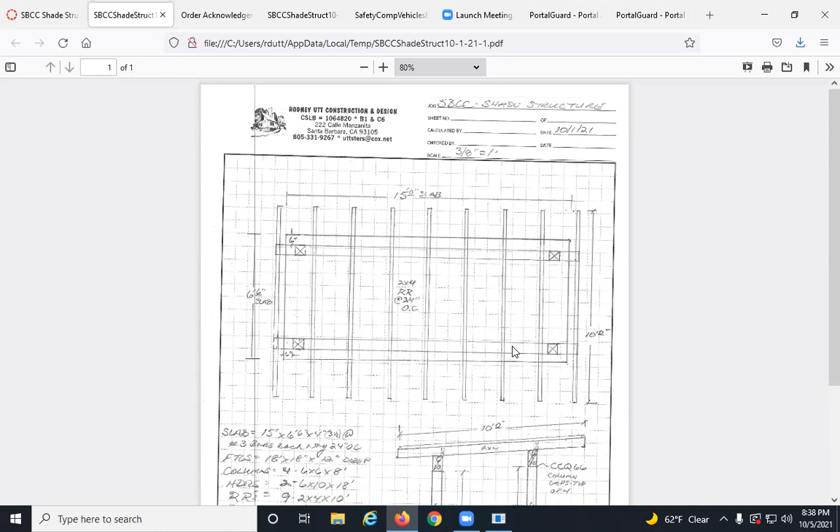So do we need any additional screws or nails or anything? Yeah, we'll need duplex nails, and I'll find out—we probably have nails here for our guns, for the framing guns. I think we'll need 16s and 8s. Did Patrick tell you about the new framing gun? No, he couldn't figure out how to use it. Did he figure it out? Yeah, I went over there and showed him you have to hit the on button. That's embarrassing—that could've happened to me too.

These are really hard to find the on switch for. Yeah, is it? Just using compressors.

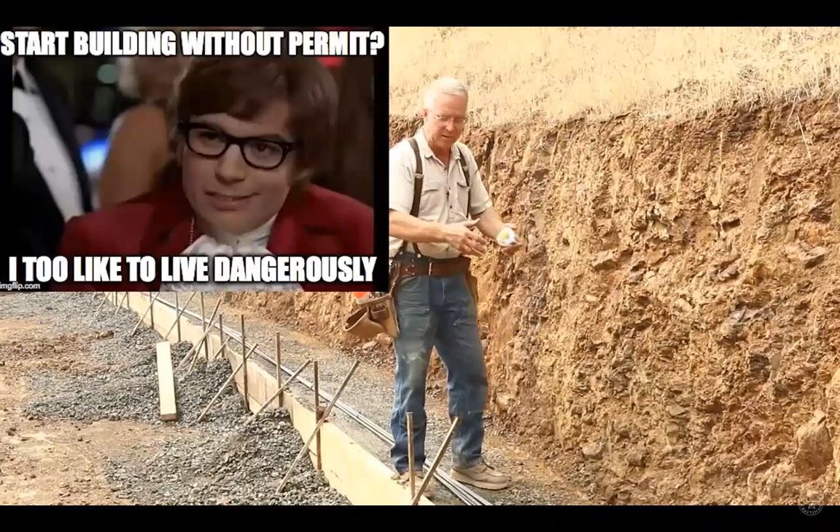Building in a world governed by the International Building Code, which includes the permitting process, engineering, and plan inspection, means you have to comply with the drawings approved by the jurisdiction that has oversight. There are life safety issues, policy issues, and code requirements that exist for questionable reasons and code requirements that exist for darn good reasons. At this point I'm setting up a footing that has to comply with the drawings my engineer provided, because the county will approve those drawings and the inspector will evaluate the site conditions against the approved plans.

The approved plans say this footing needs to be 48 inches wide, and it is, except in a couple spots—like right here, it's 46 inches wide, and right here it's 45 inches wide. So we're going to go back along this corner and break off some of the rock that intrudes into the net width. See those form sticks?

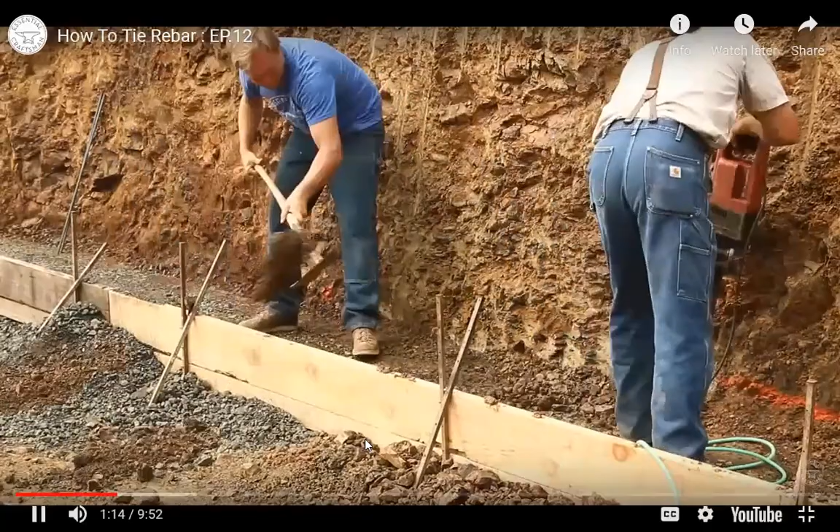Those are duplex nails. If you look close enough, you can see the head sticking out. They're using all steel stakes, which are reusable. We will use Number 3 stakes.

Number 3 bar is 3/8 inch. Number 5 bar is 5/8 inch. Number 10 bar is 1 1/4 inches. If you need number 6 bar, it's 3/4 inch.

The mat on the bottom of this footing is number 4 bar with 3 longitudinal continuous bars, and the transverse bars at 90 degrees happen at 18 inches on center.

Development length is the distance that rebar has to lap in order for the strength of the concrete at the lap to be such that it will hold those bars together as if it were a single bar. I'm counting on some of you engineers in the comments to give me a more concise description of development length. But from the perspective of a carpenter, the development length is the lap on rebar where you can tie it together so that it functions as a single bar. The typical bar overlap used as a rule of thumb in construction is 40 bar diameters.

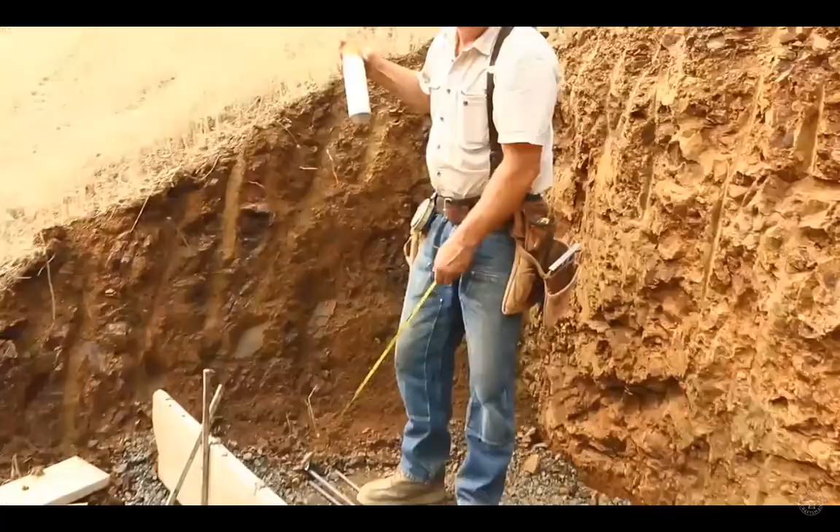I'm giving these about 46 bar diameters, or 23, 24 inches. It's a little extra. Transverse bars are specified at 18 inches on center, so I'm going to mark my longitudinal bars every 1.5 feet. 1'6", 3 feet.

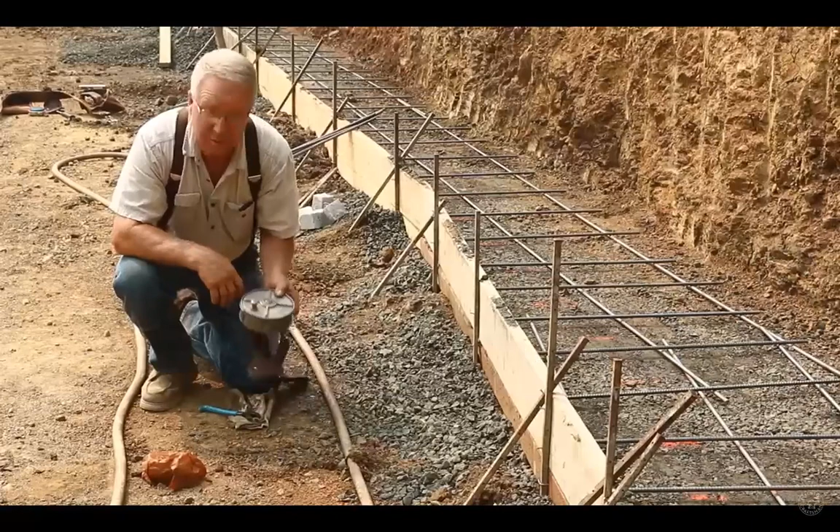We're going to use two different methods of tying this rebar together, and they both involve tie wire. The first is using a wire reel. This is the tool that you'll see pros using, particularly iron workers, and guys get to where they're so fast with these things. If you don't have one of these, it's really hard.

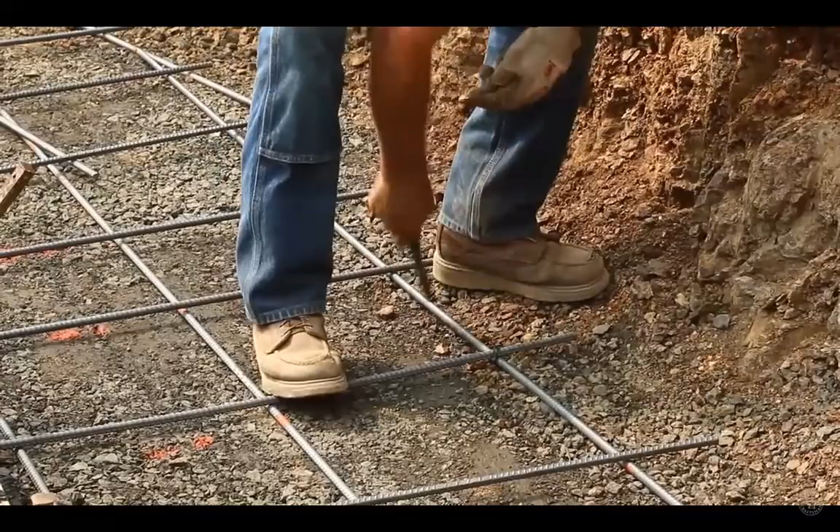So you start it through there and you tighten it up. You really only need a glove on your left hand if you're a right-handed rod buster, because this is the one that's going to get all greasy from the wire. With this bar in the right spot, you hold it back so you have 3 inches clear. You put it on the layout, you pull it tight, you give it a wrap, you cut it, you twist it. That's tied. That's just a simple overhand tie.

Now we're going to show you the other way that we're going to use, that Nate's going to use. Slide it under there, grab the end, grab the other end, tie.

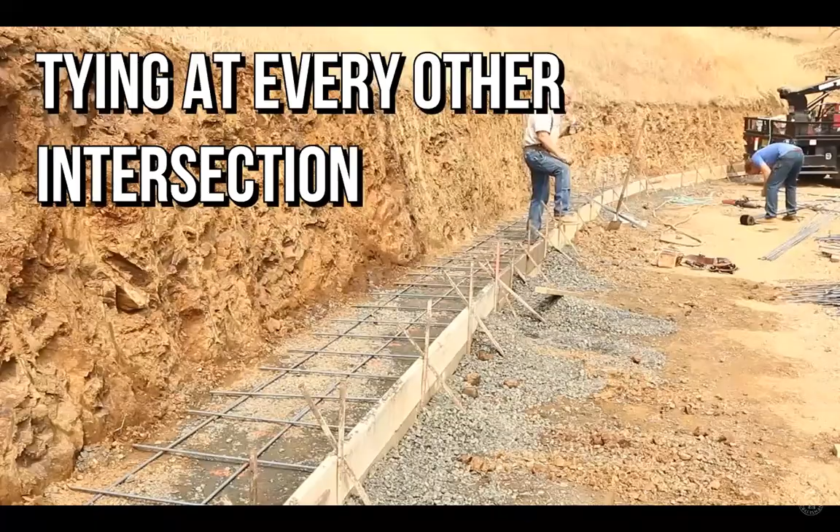One of the things that the engineer has specified and that the inspector will be looking for is the distance from the rebar to the dirt and the distance from the rebar to the face of the concrete. That's because in order for the rebar to contribute its full strength to the structure, it has to be fully encased in enough concrete so that the full tensile strength of the material is contributing to the stability of the overall system, which is the tension.

The other reason is because you don't want this rebar rusting inside of your concrete, so you keep it back from any place that water might tend to wick up from the moisture, or come back in from cracks and rust the rebar inside the concrete.

So clearance - I'm going to accomplish clearance from the soil with these. These are called wired dobies, little blocks of concrete with wire already on them. We put that underneath the mat, tie it to hold it in place. It holds the rebar up 3 inches from the soil. That's what the engineer specified. We will have dobies of other sizes in other applications, but in this footing it's a 3-inch clearance. We're going to use lots of 3-inch wired dobies.

So these footings are withstanding at least 2 primary forces. They're withstanding the weight of the wall and the soil that's pushing down on them. And equally important, they're resisting the overturning moment, the tendency for the hillside lot to tip the wall over. So they're cantilevered, they're wide, and they have 2 mats of rebar.

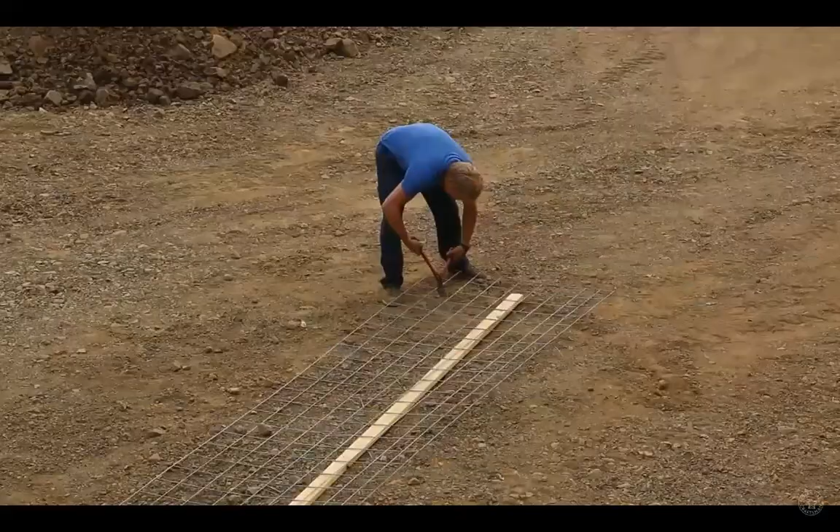So I thought, hey, let's just get a hog panel. Hog panels are a type of fencing — galvanized, number 9 wire, spot welded at the junctures. They're pretty good, they're stiff. So we cut the strips the right width to space the bottom and top mat, and I'm bending these things about 1 foot from the end.

Do you think this is a footer for a retaining wall? Yeah, exactly. Look at that.

I'll just wire that to the bottom mat, and it'll create a nice little table to lay the top mat on, hold it up, and it will never degrade. It doesn't put enough steel in there to create any kind of weakened plane joint. The footing won't even know there's additional wire in there, but it'll hold the top mat in a plane, up away from the soil, with clearance from the face. Awesome — I'm going to write that down in my little book as one for the good guys.

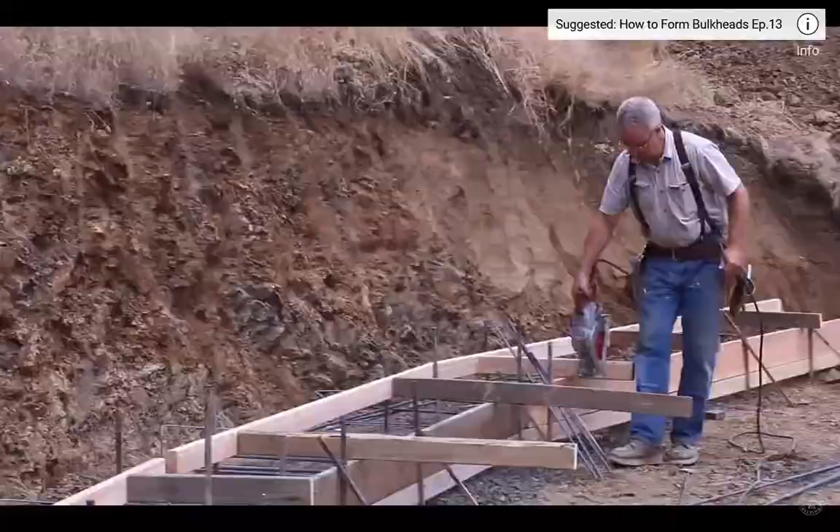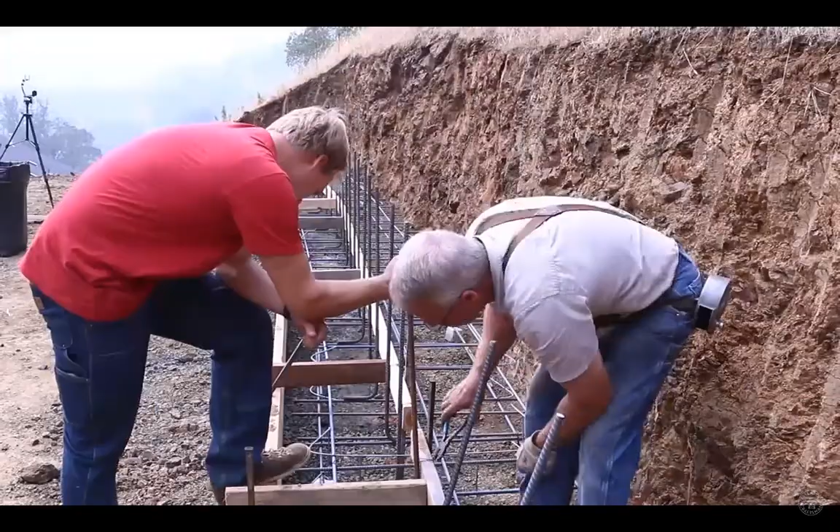It's a big footing. There must be a big surcharge on that bank. It looks like it is.